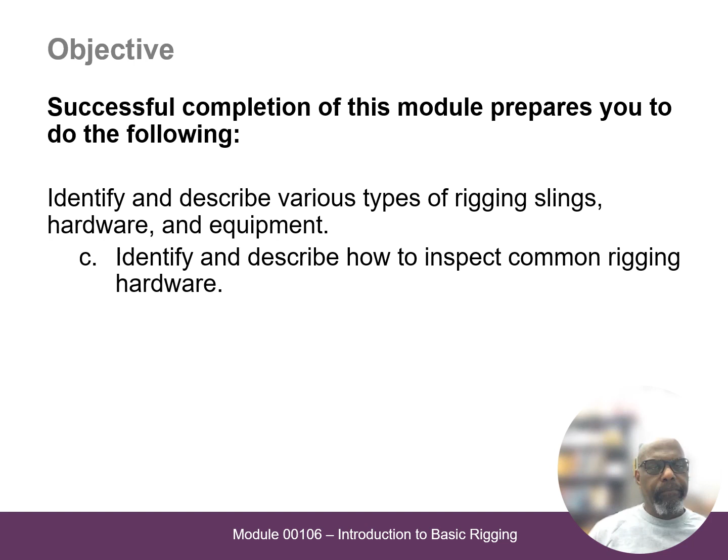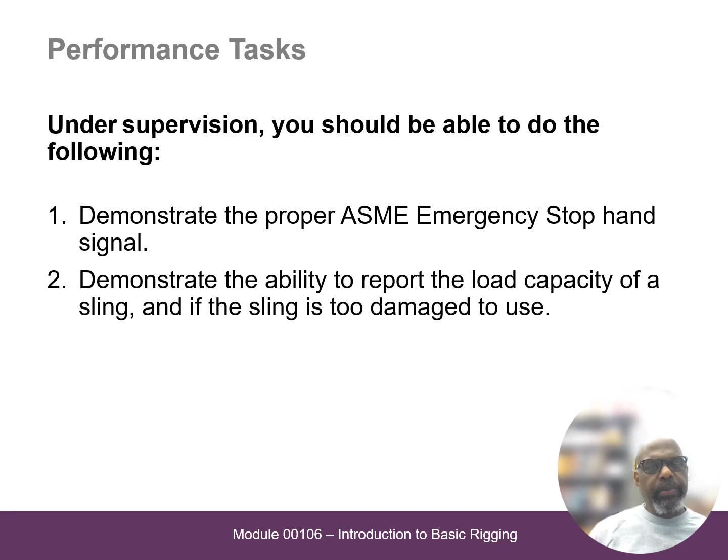We'll be looking at a performance task when we come back to class, and look at how to demonstrate some different things by lifting a load.

Some of the terms we use for lifting include shackle - a coupling device usually connected to slings, hooks, or other devices. Load stress is when we put strain on a lifting device. A threaded shank is a connection end of a fastener, such as a bolt, with a series of spiral grooves cut into it. The grooves are designed to mate with grooves cut into another object in order to join them together.

Lifting clamps - there's many different types, but it's a device used to move loads such as steel plates or concrete panels without using a sling. It's pretty neat how these lifting clamps work. You see them in steel mills and places that lift very heavy sheets many times.

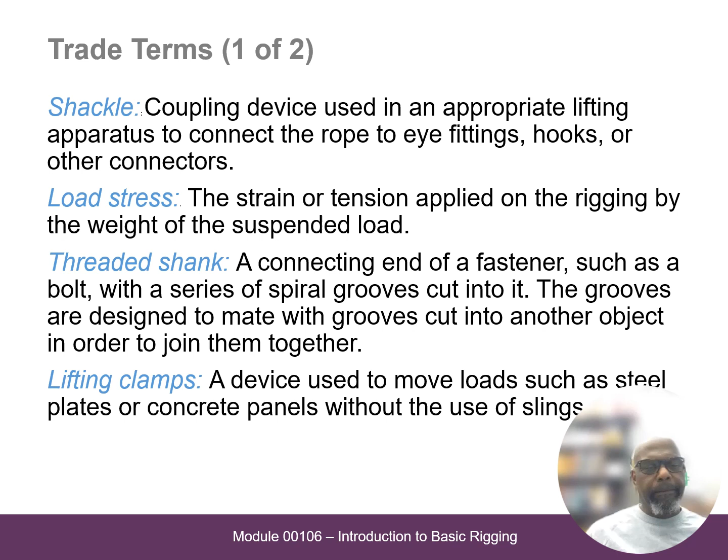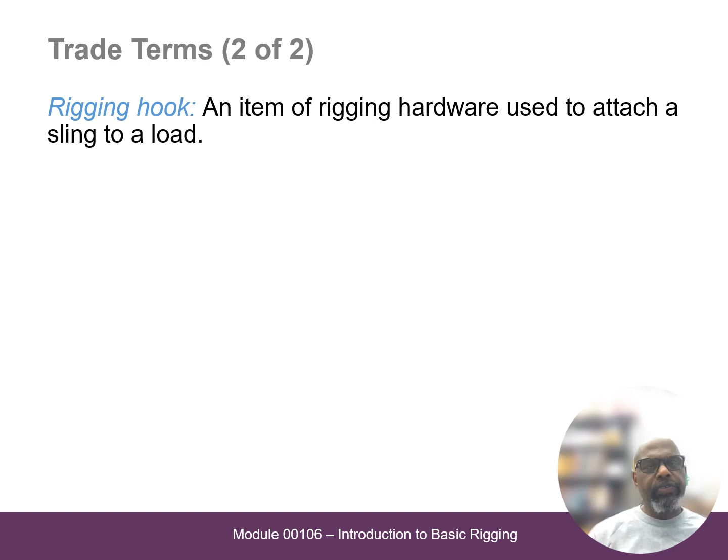A rigging hook is basically an item of rigging hardware used to attach a sling to a load. So let's take a look at some of these pieces of hardware.

These are what we call shackles. It looks like a U shape with a bolt through it. This can connect to hooks, it could connect to slings, synthetic slings. A screw pin shackle, shown in red, and an anchor shackle are the most common types. What's common with all these is there's a bolt that threads into one side.

Well, not all of them are bolted - this one uses a cotter pin. These here have cotter pins also, but they do make ones that are threaded in. These are easier to install and take apart compared to the cotter pins, which need a tool to actually put in and remove.

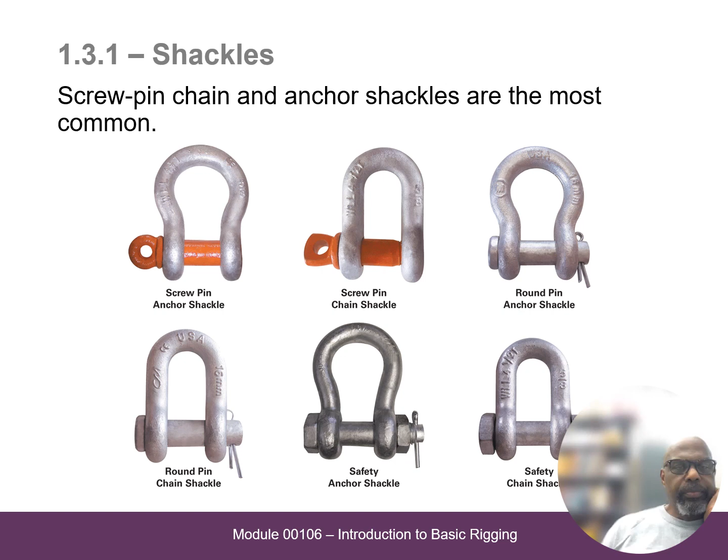This shows you the threaded pin - basically clockwise to screw in, counterclockwise to take it off. This little hole here, we can stick a screwdriver or a rod in to help tighten it or loosen it.

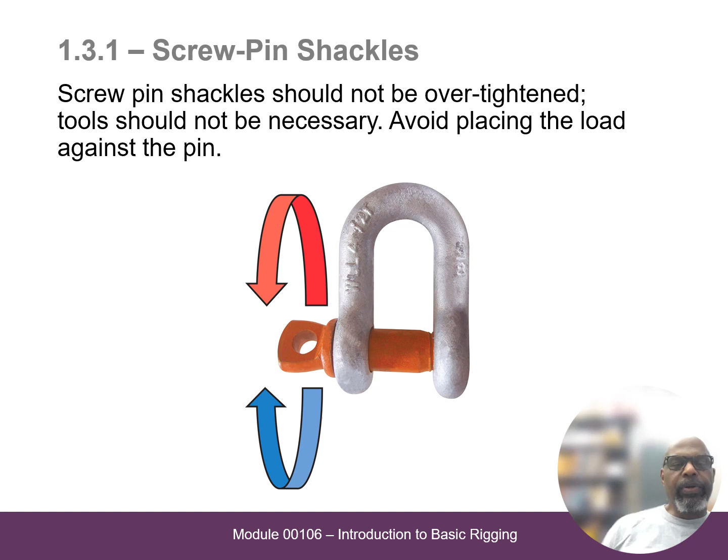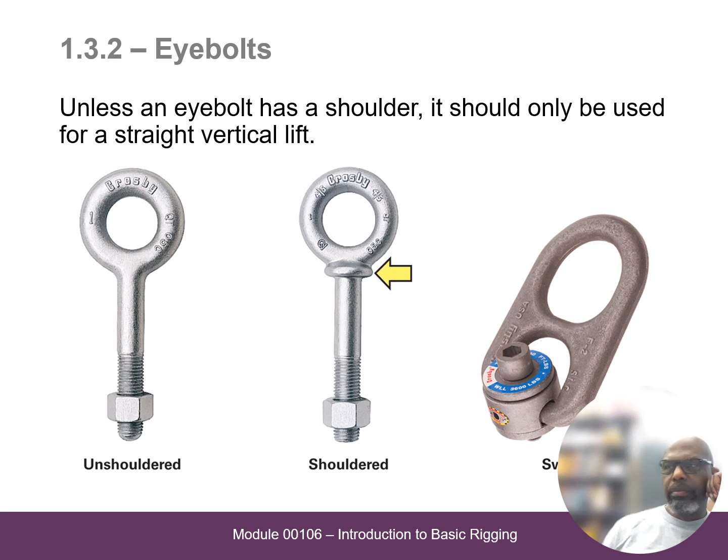Lifting clamps, like I said, are used for lifting sheets and things. They're really neat - you slide this over the sheet, and once you pull on it, the jaws close up and hold it in place. As soon as you release it and take the stress off this rope, it will relax and let go. It can lift very heavy pieces of sheet metal and other things, even concrete blocks or complete concrete slabs.

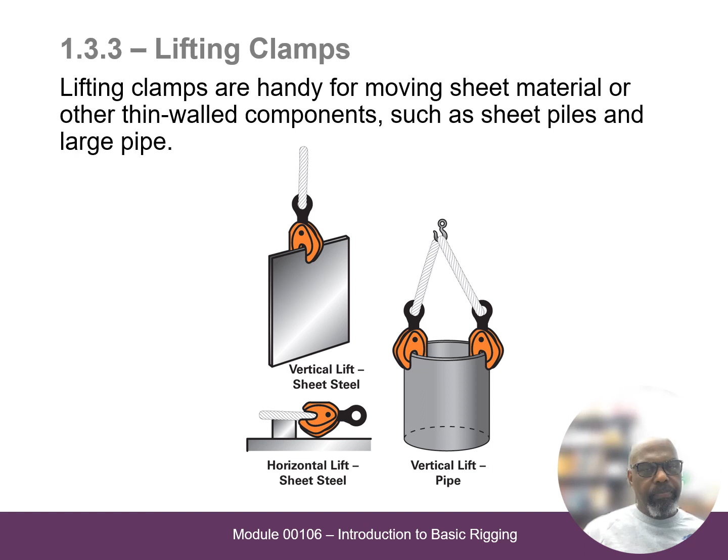Here's some of the things you look for to reject it: if there's any damage, if something is bent, if it's been grooved into or somebody accidentally cut into it, or been dragging on the ground and some material has been ground off, or it's rusty, it needs to be replaced, destroyed and replaced.

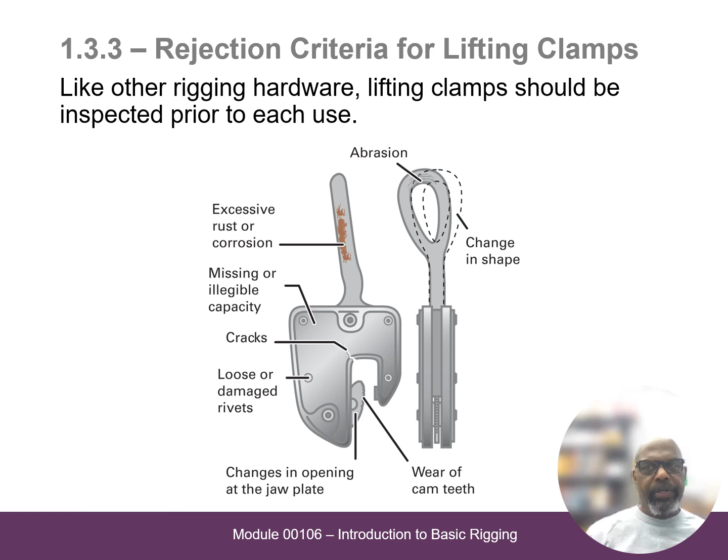These are rigging hooks - many different types. Take a really close look at it and read the descriptions in your book. For example, how the eyelet is positioned. This eyelet is in the same position as the hook. This eyelet is 90 degrees from the hook - the hook is going this direction, but this is going that direction.

This is another one you could thread through with a line. These are designed to hold chains, that's why it's so narrow - the link will pop into it, one section of it, then you'll be able to lift. This is if you are using turnbuckles or shackles, you can use these type of hooks. These are used again if there's chains you're trying to lift.

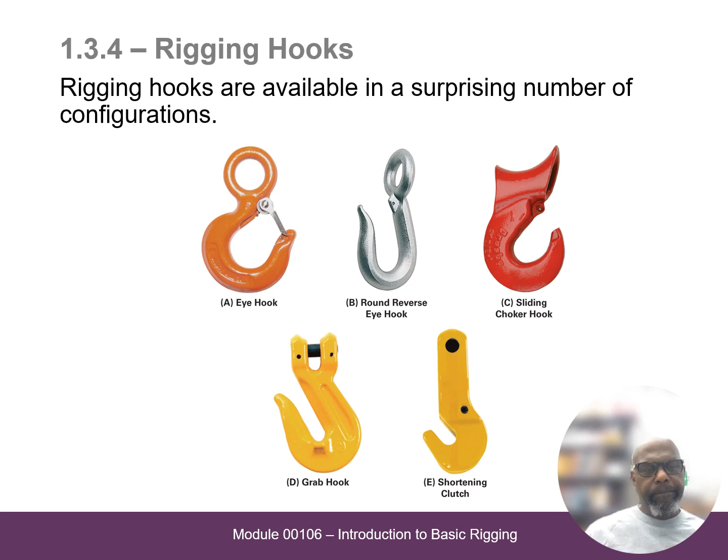These are other types of rigging hooks that are defective - again just going through an inspection, looking for certain things. For example, this latch here keeps the chain, cable, or rope from slipping off - it's spring loaded, and if it's broken you need to get rid of it. Look at this - this is twisted. This stop here doesn't make contact. This one here is rusted. So any of these, if it's broken, damaged, or scratched up really badly, it should be replaced.

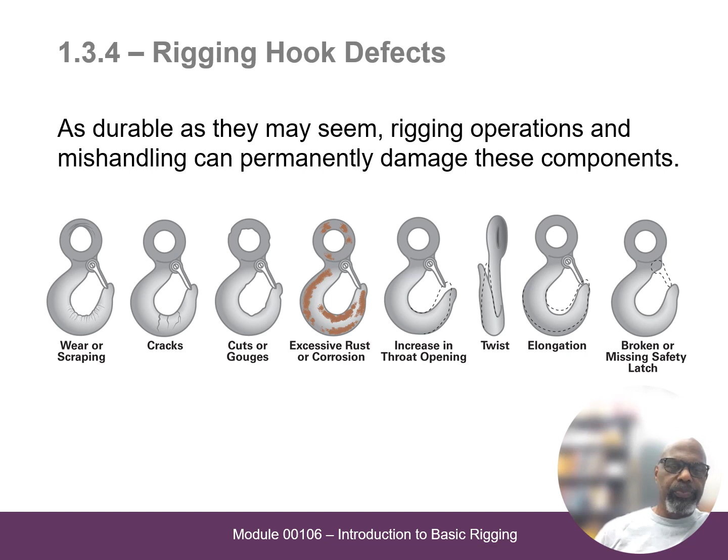What's wrong with that hook? This hook has been stretched out of position. This hook here should be touching this, but it's been overloaded, which caused it to stretch. If you're trying to lift a load, it might slip off.

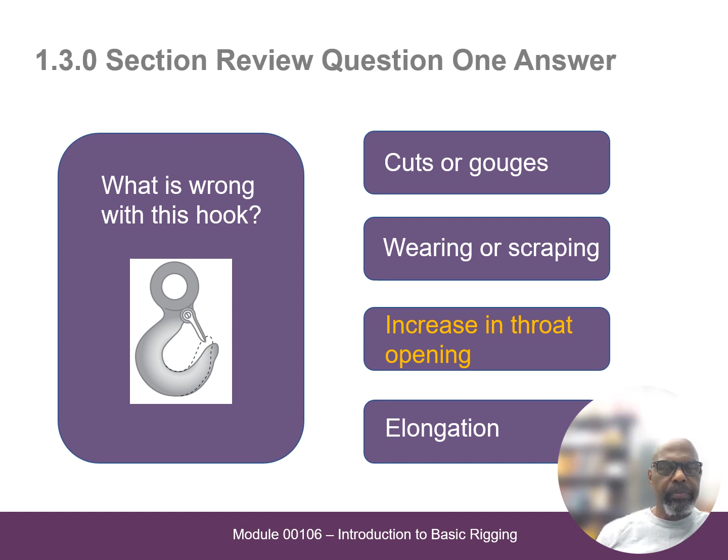This shackle here - what type of shackle is pictured? If you look closely, it's not threaded, it has a cotter pin. So it's a round pin anchor shackle.